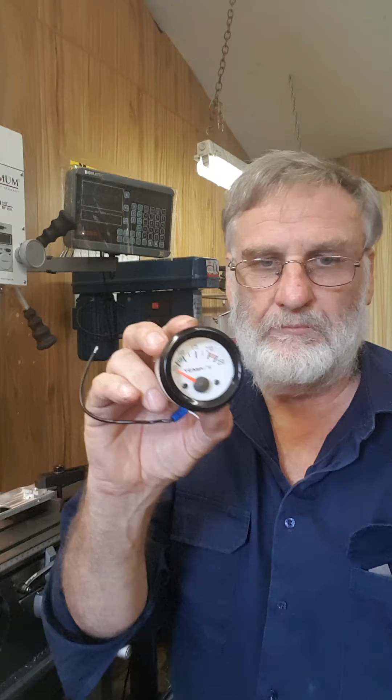So I have a crook temperature gauge in the dash, and it's out of the original Chrysler. So I bought an aftermarket temperature gauge, and I made up this plate to mount the temperature gauge, but it looks a bit empty. I'll show you it properly in a second.

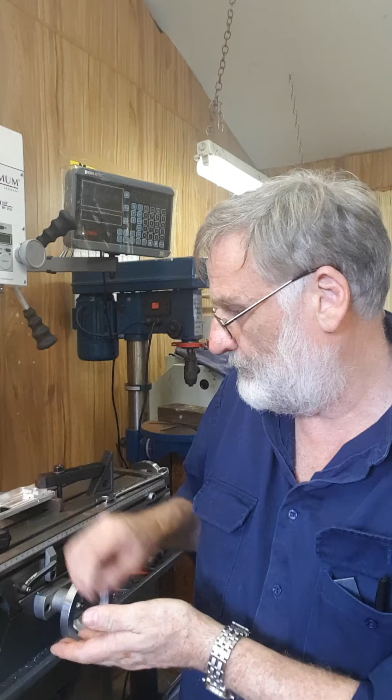So I bought a little Bluetooth dongle, a Bluetooth power outlet, and it has a voltage display on it and a socket, cigarette lighter style socket. So I'm going to modify the plate to take these additional sockets. I've drawn up a drawing.

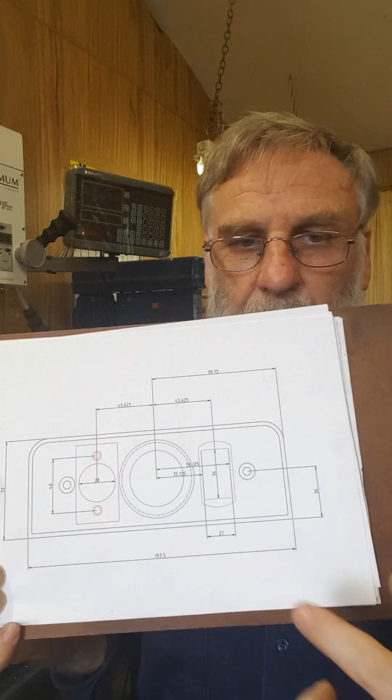So this is what I'm making. I've got all the dimensions I think I need for manufacturing it. With the digital readout now, it should be pretty straightforward. So I've already machined this hole here, and I've drawn in the bezel on the gauge, and there's the Bluetooth, and there's the power socket.

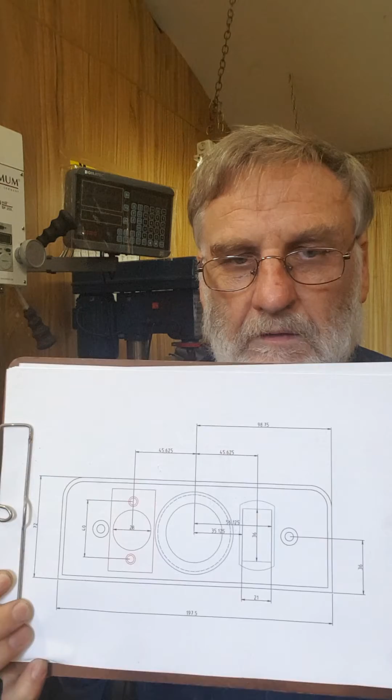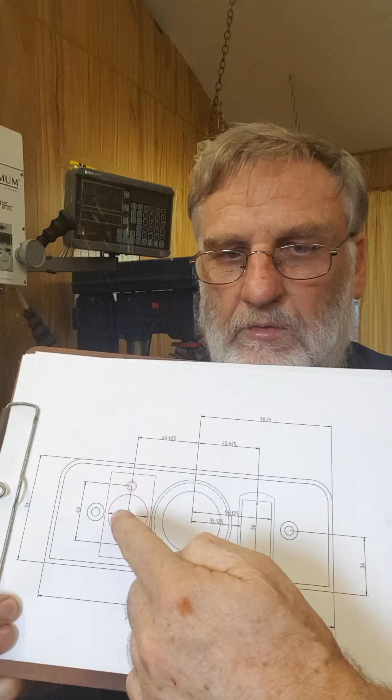I'm a little bit disappointed. I put these holes here into the plate already, and they're there because I'm actually blocking out an old radio panel, the hole in the panel for the radio. The car with the V8 and the exhaust on it is too noisy to be listening to the radio anyway, and the radio that was in it didn't work. So the hole that is in the panel is a little bit in, and I drilled these two holes previously without thinking about those, so that I could easily install it with a couple of countersink screws through here and panels behind the dash to hold it in place.

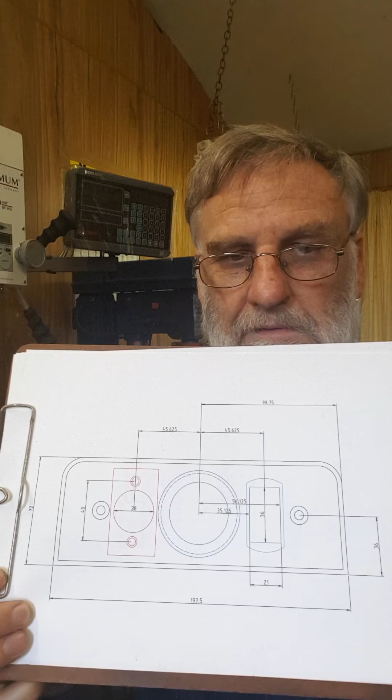But I probably could have spaced them out a little bit more, but now because they're already in, I can't really block them out. So I'm fairly tight inside of there, but worst comes to worst, I can always make another panel, but I'd rather not if I can get away with it.

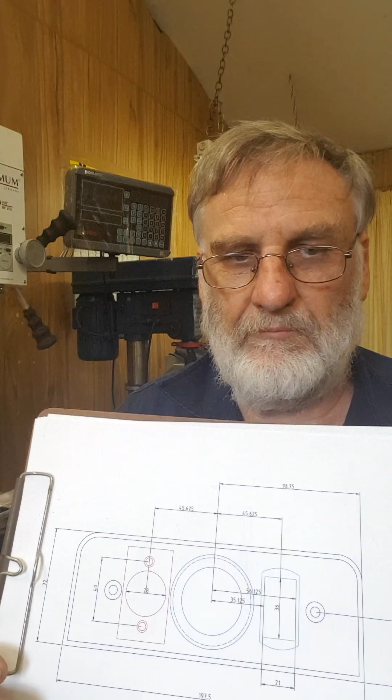So this is what I'm about to start. So I will set the camera up so we can see the machine table. I've already clamped the job onto the table, and we'll start machining.